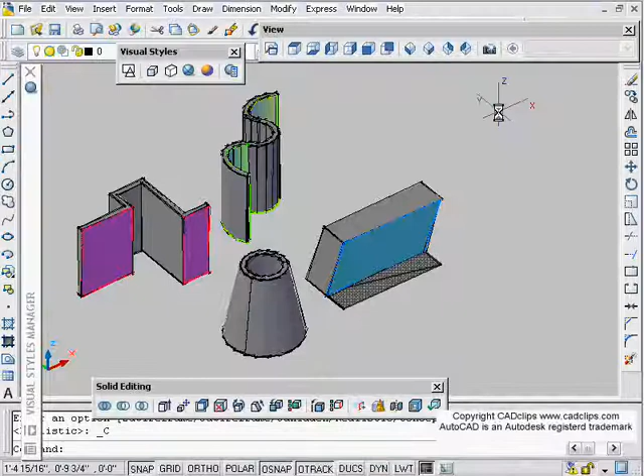In this lesson we're going to talk about polysolids, which is a new object type. I'll start by going to Tools, Palettes, Dashboard, so I can have my dashboard in or out. In our last lesson we talked about the section plane. Now we're going to talk about the polysolid command.

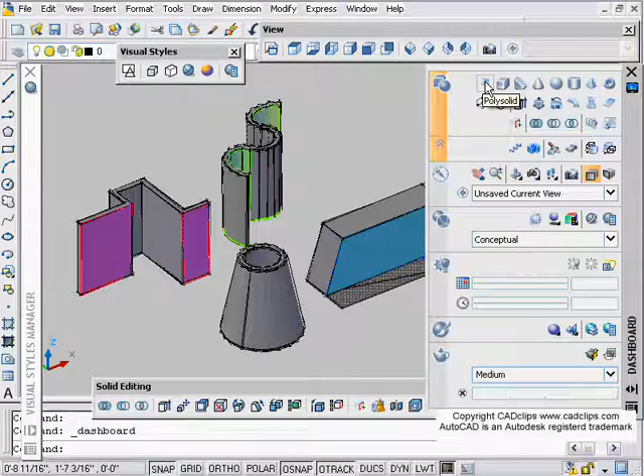Really easy stuff - if you want you can just pick on polysolid and start to draw. You can use your ortho, etc. Polysolid just kind of draws walls in its natural state.

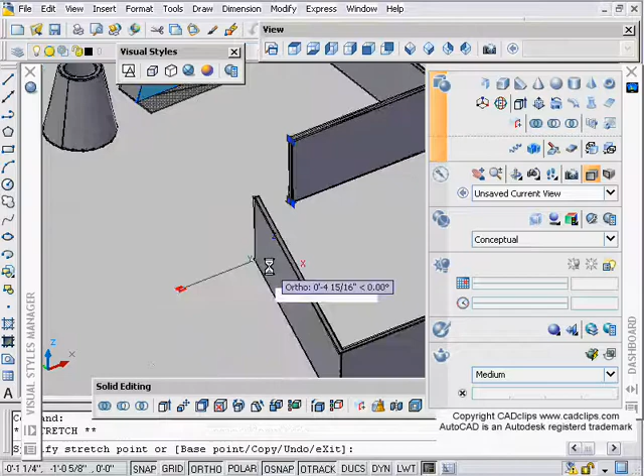Once you have that, you'll notice some special grips. First, you can grip here and stretch this way. This one will stretch this way, and then we can stretch using good old grips that way. Also, at the beginning of that polysolid we can grab grips and stretch these out, and that changes the whole object.

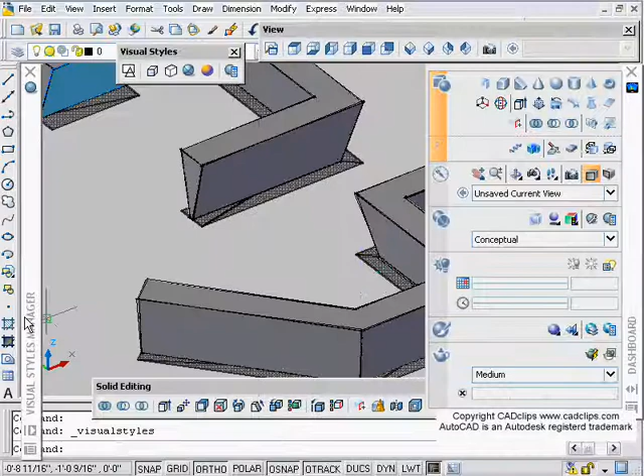I also have ground shadows turned on here. Let me turn that off. I'm going into Visual Styles, in Conceptual, and going down to Shadows, Ground Shadows - which is right there. Display ground shadows off.

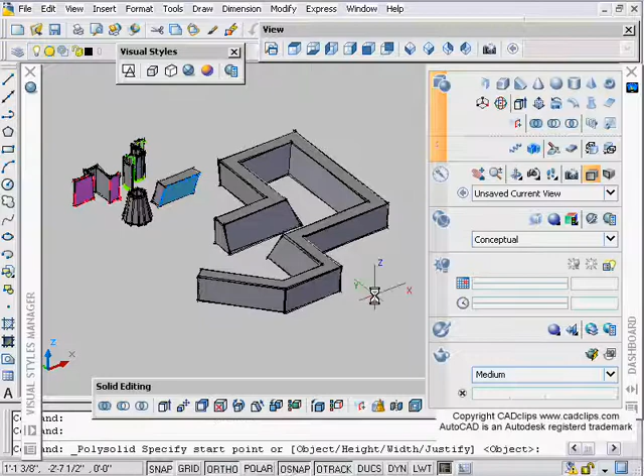Now we can click back on here and grab this grip and stretch that out. That was just drawn again by clicking on our polysolid command, and off I go.

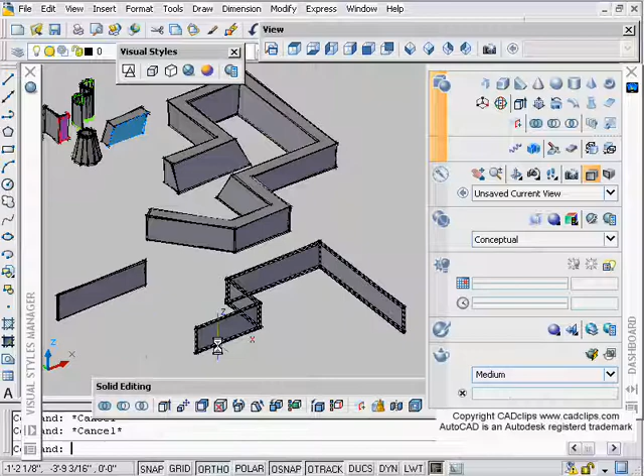These are the default heights and widths. Also, if you hit escape like I just did, it stops - unlike some other commands where you have to hit enter or space bar, in this one if you hit escape it'll just stop right there. So that's one way of doing it.

Now as you draw your polysolid, look at your command line down here. It says object - which we're going to do - height, width, and justify. So if we say height right away, we can either type in a number or pick points. I can say, well, I want it to be this high.

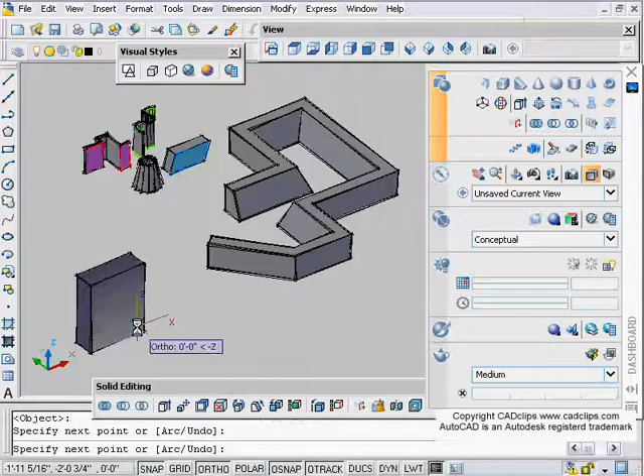Now I'm going to say W for width - well, I want it to be this wide. Then if I start to draw, I can use that height and width. I keep hitting escape on that, and I shouldn't - enter. So that's it, and then again same thing with my grips, up and down, do whatever I want with it. Isn't that fantastic? Use your ortho or not.

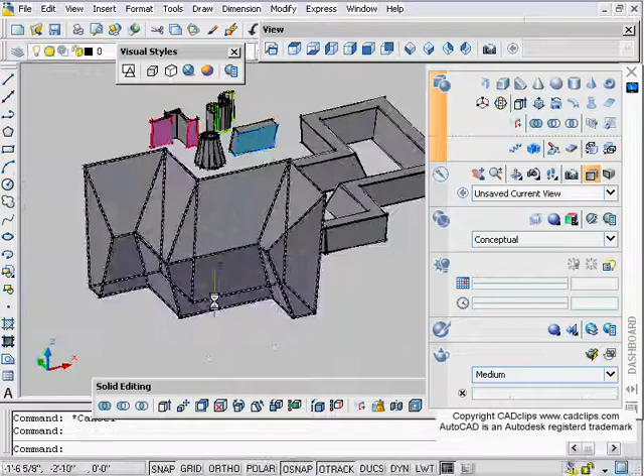You can start to very quickly, as you can see with shift middle mouse, get some interesting shapes off of that right off the bat with polysolid. Or we can just do object.

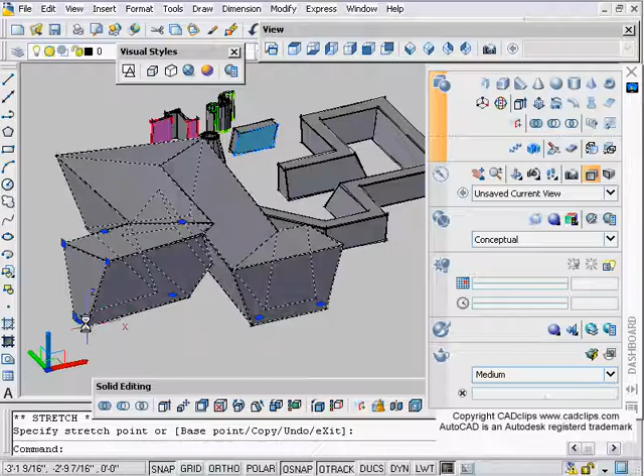Maybe I have a polyline over here. I'm going to draw a regular old AutoCAD polyline. I'll click on here, hit enter, and pick this, and it just converts it. After I do that, it remembered the last width and height, and then I can grip on these and do whatever I want with them.

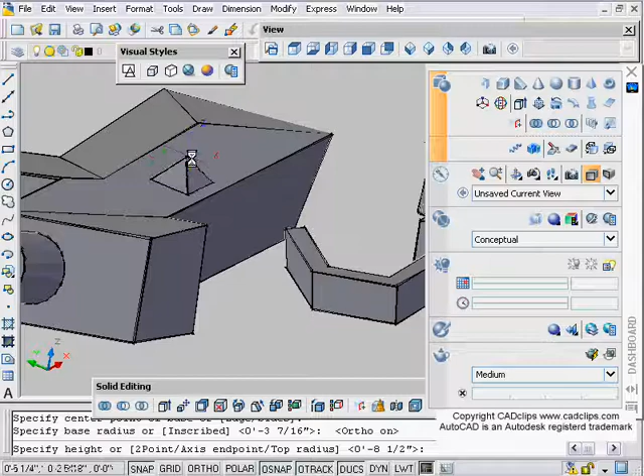After I do something like that, if I want to draw something off of that face, I can draw a cylinder - as long as my dynamic UCS is on, I can draw off of that surface. You can see how quickly I can maybe draw a pyramid using my dynamic UCS and ortho, click, and place that right on top of that surface.

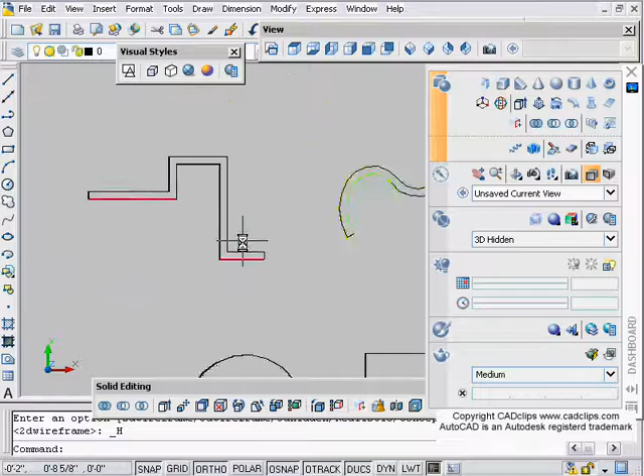Shift middle mouse button. I'll do an erase on these objects. I can go back to my top view. That's what these are - this is a polyline that's been fit curved. I could change this back to be 3D wireframe.

This was a polyline, this was a circle, and this is something I made - I think this was just a line. So let's try that. I'm going to draw a line, I'm going to draw a polyline.

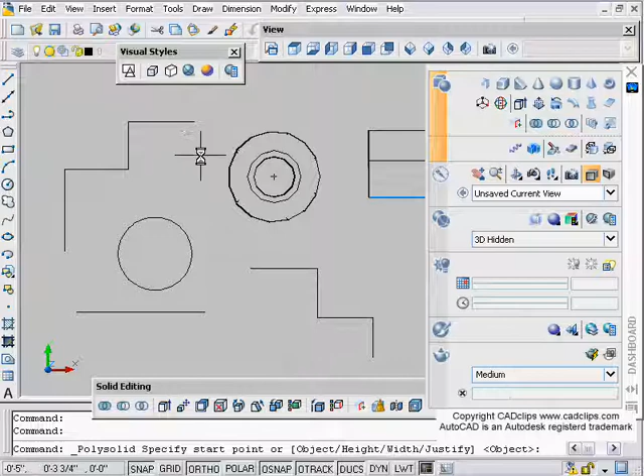I'm going to draw another polyline over here, and I'm going to draw a circle in here. I'm going to pick on my polysolid and I can set my widths and heights beforehand. Width, well, I only want it to be this wide. How high do I want it to be? H for height, command line. I want it to be about this high.

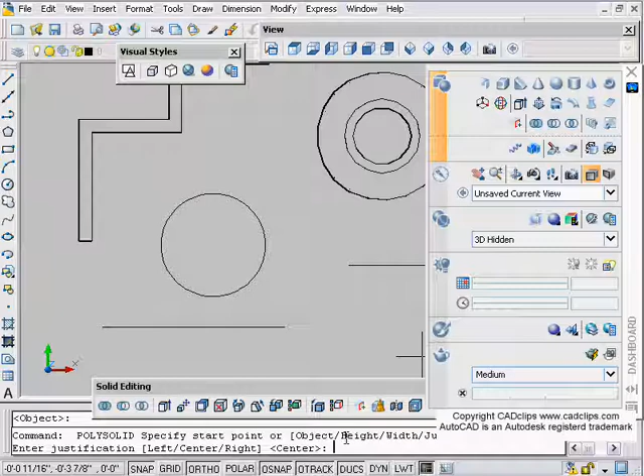Then I just hit enter and pick on this object and it converts it. We could have said justification as well. Enter, start my command, I can say J for justify. Left, center, or right. Center is fine, and then enter is an object. Pick on here and I'm done. Enter, enter, pick, enter, enter.

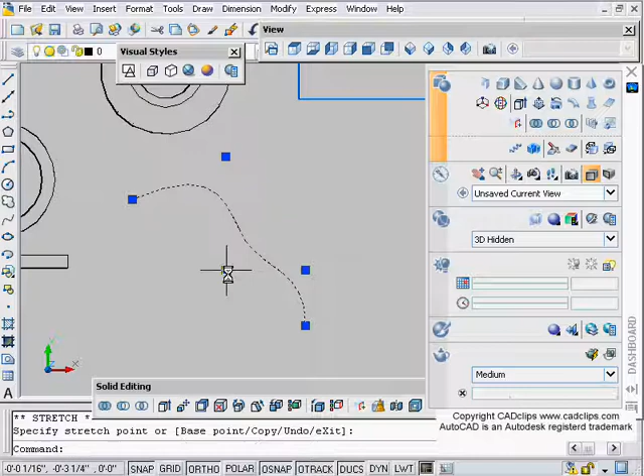Oh, I want to spline this. PE for polyline edit, pick on here, and then we'll do a spline. Enter, pick on that spline. Maybe grab my NURBS, do what I want with that. Start my polysolid, enter, pick. Converts it. Go to my 3D view and there's my 3D objects.

There's the circle. The circle, I can grab this grip and I can stretch this in. I can stretch that one in. That's how I got that shape.

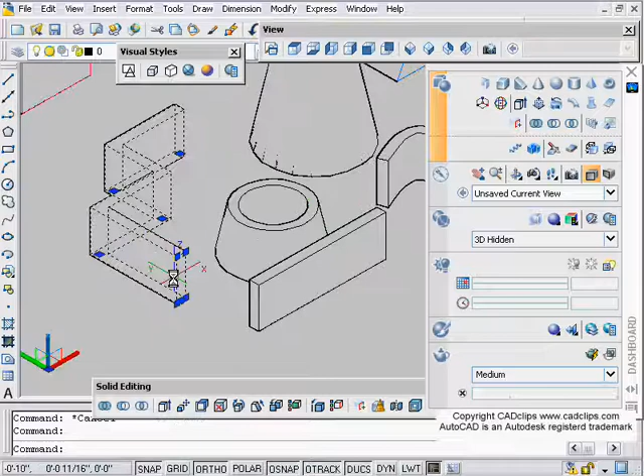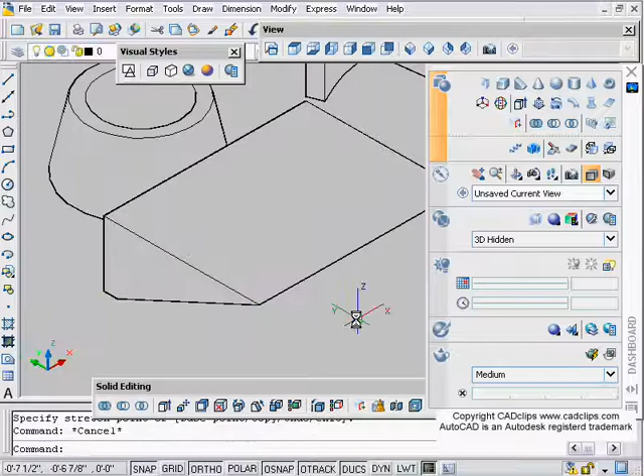This one over here, same old stuff. Stretch it out, stretch it out. Grab this guy, that was just a line, nothing fancy there. Click on here. Drag up, drag over. If you go back to the point, you'll notice that you can change directions by using your UCS.

And then this guy over here, what can we do with that grip? Turn my ortho off, you see my ortho is causing problems. Look at that, that's pretty slick. Go to my view over here.

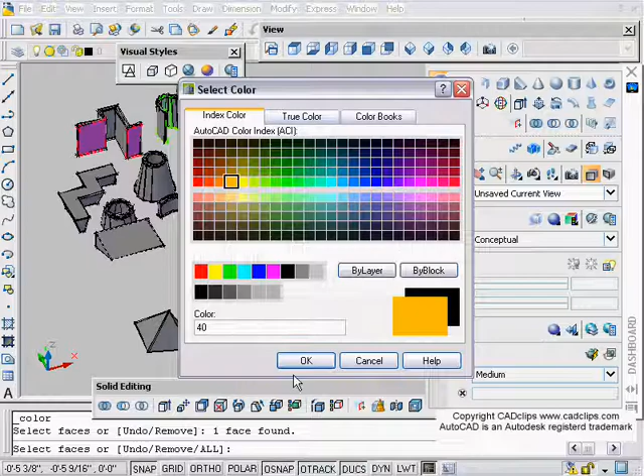And then of course all I did was go down here, color faces. Pick on here. Enter, pick a color, hit OK. Color face here. Enter, pick a color, hit OK. Go around and color the faces.

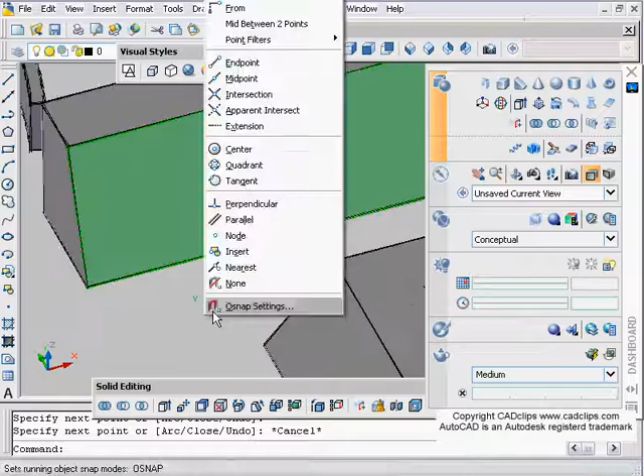So polysolid, read your command line. You can use existing geometry. You can justify it, you can set the width and height, or you can just start to draw, depending on, you know, maybe you want to draw even on the, I wonder if you can go on the top of this surface here. Shift middle mouse button here.

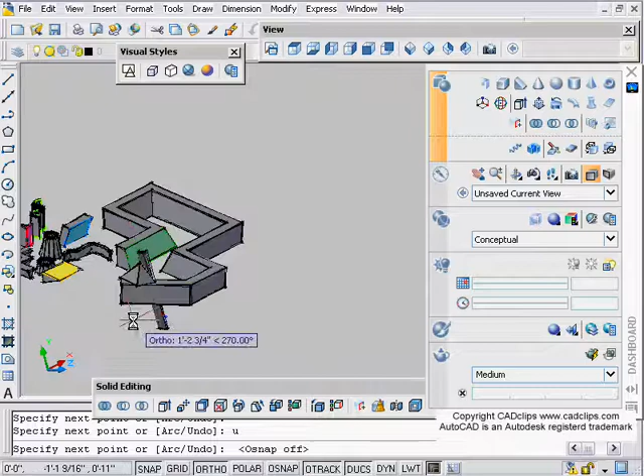Let's do our polysolid and let's hover over here. Look at that. I can act, oh, I hit my snap on that, but I can take my snap off maybe. I probably want to move my origin, UCS, origin to that point. That might help me be able to draw in here.

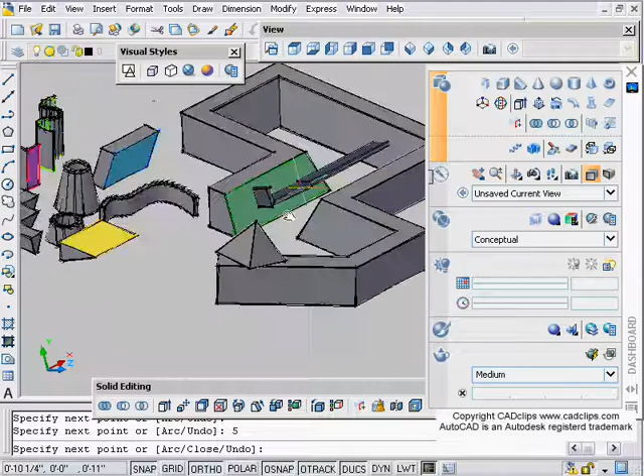Go in that direction and type 5. And then go up and type in the number 2. Enter. So I drew that polysolid right on the surface, that is all I wanted to explain by using my dynamic UCS.

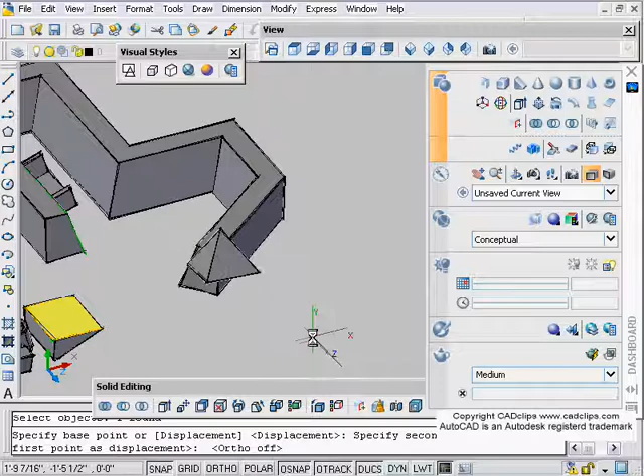Okay, there's a pyramid up in the air, right? No problem. We can go M for move, pick that, grab that endpoint, move it down to there. Now that it's down there, we can take that and move that around. Let's see where that is. Oh, I got everything kind of skewed on an angle here. Let me just get rid of that.

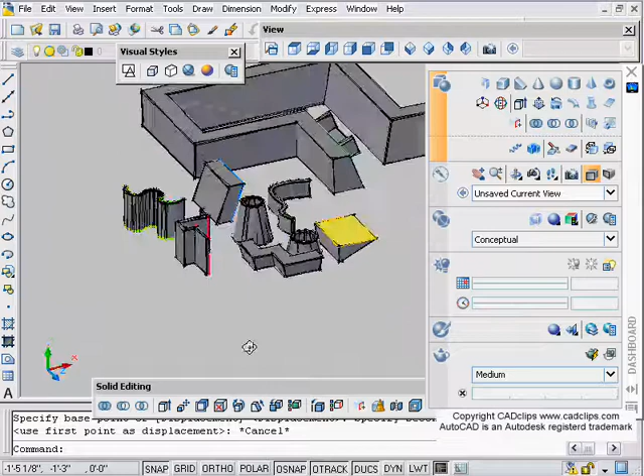So my point being is that you can take these and you can move these objects around, and as they interfere with each other, you will see them displace. So there's our polysolid command. Have a look at your command line, convert existing geometry lines.

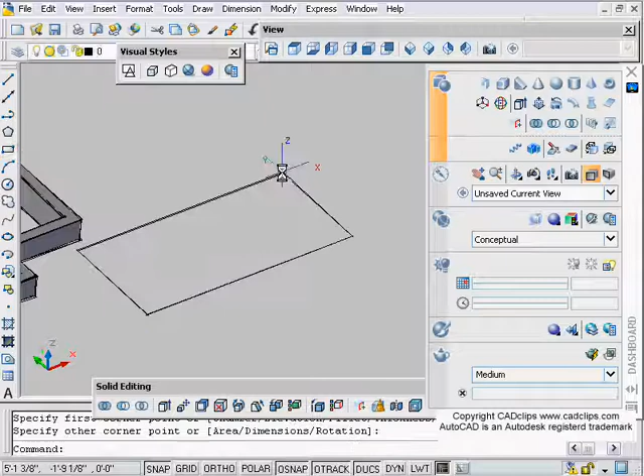I would go in and maybe try some more of these shapes. Very quickly, it'd be easy to go in and make a rectangle. Oh, let's do UCS world, that's probably my problem. Make a rectangle box, pick on my polysolid, enter, pick on here, and you're done. Then you can use your stretch command, instant walls I guess you could say, and then go in and have a look with your grips and have some fun with them. They're not hard to use.